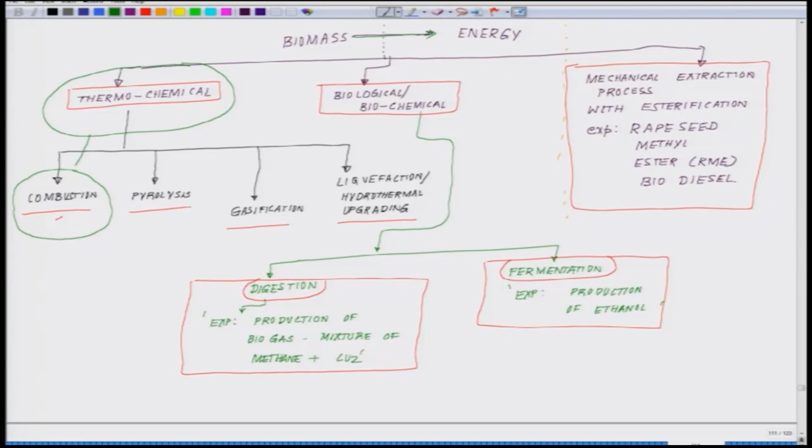Today we will come back to the chart where we left off in the last class, the outline of biomass to energy formation. Our goal today will be to understand the most primitive and simplistic of all processes under the thermochemical category, which is the combustion process. So today we will start with the combustion process.

Let us move on to the slide. As we do in every class, first we will talk about simple combustion. Combustion is a very straightforward thing.

You take a biomass—paper, vegetable waste, or anything as a matter of fact—and you've all seen that cow dung is dried and used as a fuel. Every Indian has seen this wherever they are. Each one of us has seen, during winters or any other day, people cooking with wood. These are common things.

Essentially, wood is a biomass, cow dung is a biomass. So you are burning them in the presence of air. That is all combustion is about. When you burn something in the presence of air, you have oxygen in the environment.

So what happens? Your biomass has a lot of carbon, which reacts with the oxygen in the environment, and it generates two things: carbon dioxide plus heat. Now, what you do with that heat is very important, and how you can process that carbon dioxide.

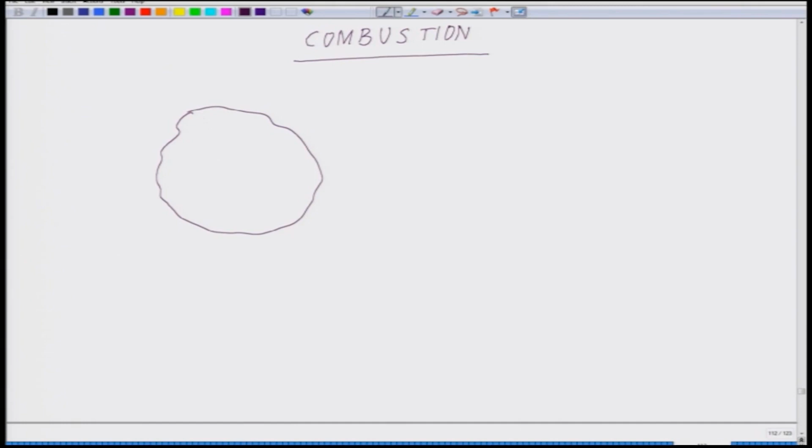Let me graphically put across what I just said. We are dealing with combustion, and in the combustion section, we have, say for example, a finite amount of biomass.

One thing you all must have observed in villages or rural places is that cow dung is used as a fuel after drying. What does the drying do? It removes the water from it. This brings us back to the very first point about properties—intrinsic water and extrinsic water, the water concentration we talked about.

Essentially, you're getting a biomass—feces of a cow or buffalo—which is rich in water. You dry it in the sun, getting rid of the water, and then use it. Let's think of it simply: let me go to the new slide. So, for example, you have cow dung.

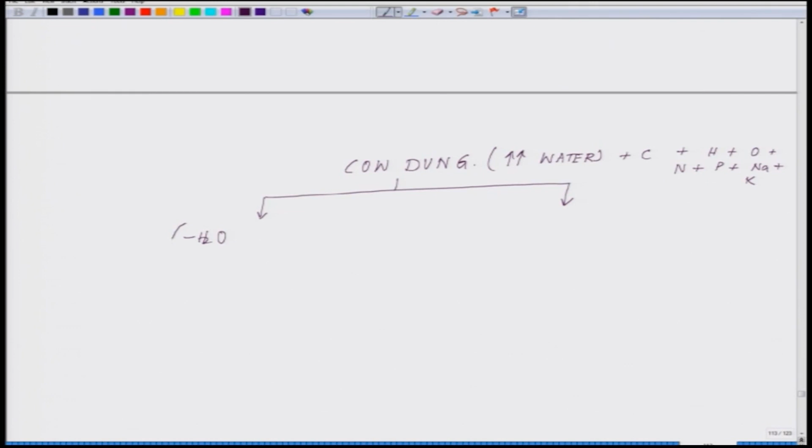This is a good example for you to understand. So, you have two routes. It has a significant amount of water trapped in it, plus of course carbon material: carbon, hydrogen, oxygen, nitrogen, phosphorus, sodium, potassium, likewise.

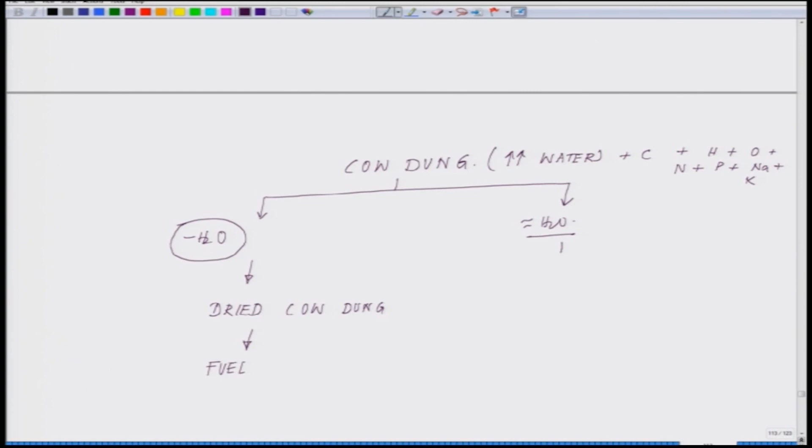Now, one route is you dry this, you remove the water, and what you get is dried cow dung, which is a fuel for burning. Whereas, you can follow another route: you keep the water intact and you put it in a closed chamber, which is a biogas plant.

So, what will happen in the biogas plant, because of the microbes which are present there, this will go through a process of digestion and also a certain degree of fermentation will take place, you cannot avoid it, and this is going to generate gas. This gas could be used for cooking, which in most places in our country, especially rural places, we use.

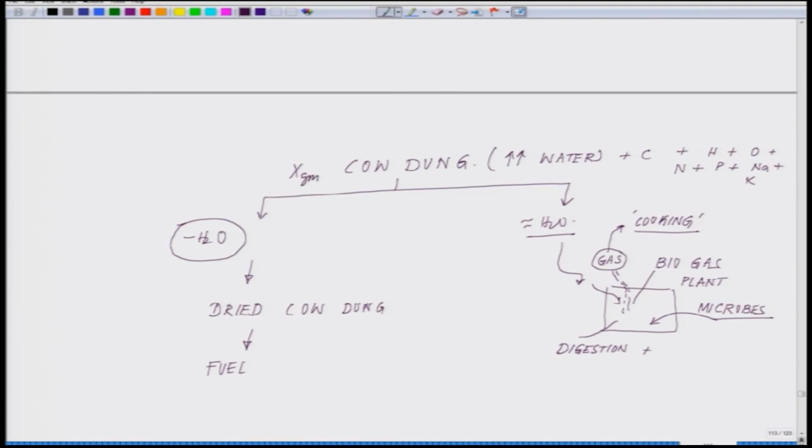Now, see, with such a small simple thing, mankind has been doing it since ages. It is nothing new that only today we have started it. But what is important is that these technologies have to be fine tuned with time and made more efficient, and what is important to realize, depending on the total x gram, x kilogram or x ton,

how much fuel we are getting out of it and how much we are losing as ash, that defines the efficiency of that fuel. So when we are burning this fuel, we are generating heat and CO2.

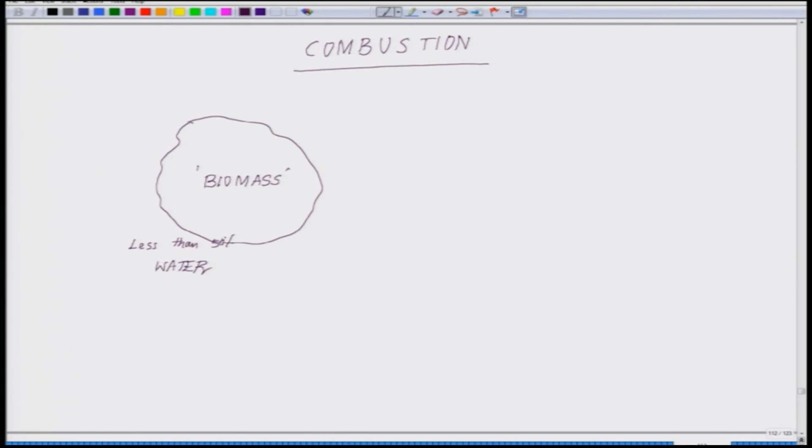So, coming back to the previous slide, when you have the biomass, you have to ensure, if you are going for the combustion route, less than 50% water. This is very, very critical. In other words, one has to ensure that you dry up the sample significantly, that at least 50% or more of the water is lost. Otherwise, this is not suitable for combustion.

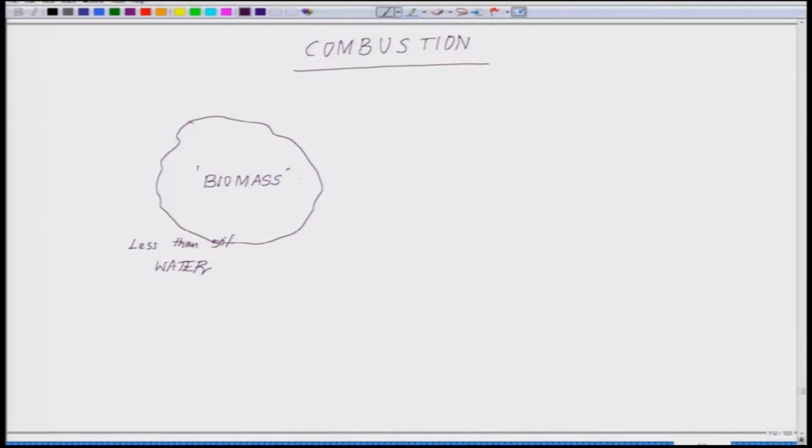Now, you burn this in the presence of air or oxygen. What you are generating, apart from carbon dioxide, because there are a lot of carbons here, carbon dioxide which is getting to the environment, which is a tricky thing, and that is where we talk about carbon capture, what you are generating is heat.

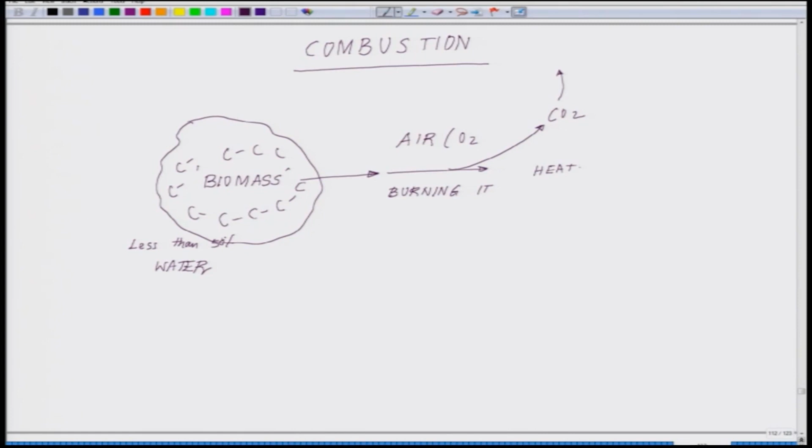Now, this heat could be utilized for several things. You can use this strategy to develop a stove, which is the most simplistic of all. You can develop a furnace. You can develop a boiler; we will talk a little bit about boilers later. You can put it in steam turbines. Similarly, we can put it in turbo generators. These are, to name a few, what you can do.

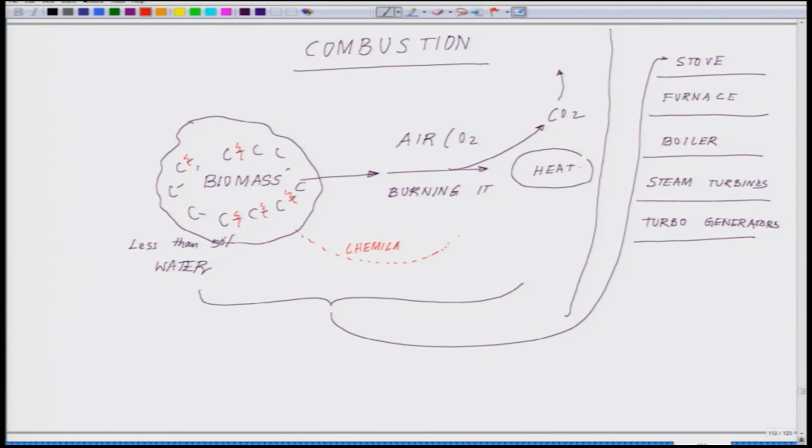And what you are essentially doing, if you remember the last to last class, you are breaking these bonds, and this chemical bond energy is liberated in the form of heat energy. This is how we carry out the process.

Now, while you are running a boiler or steam turbines, you are converting the heat through the steam, and we will talk about boiler design briefly in a sec. Just before I get into this, what is important to know is that this whole combustion process produces a huge amount of hot gas, a lot of it rich in carbon dioxide, at around 800 to 1000 degrees centigrade.

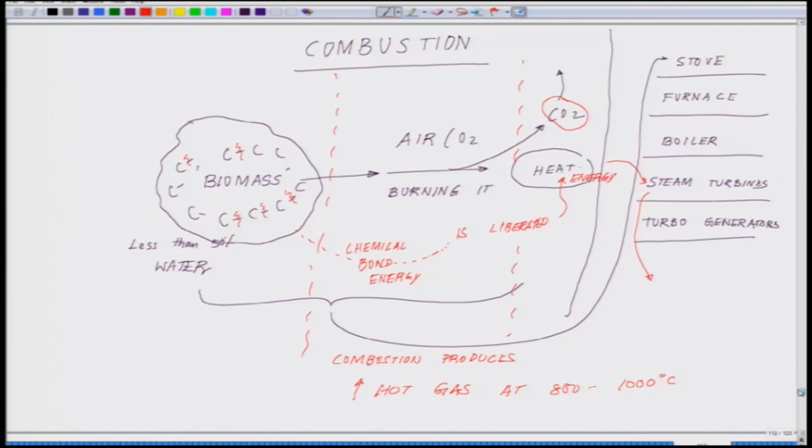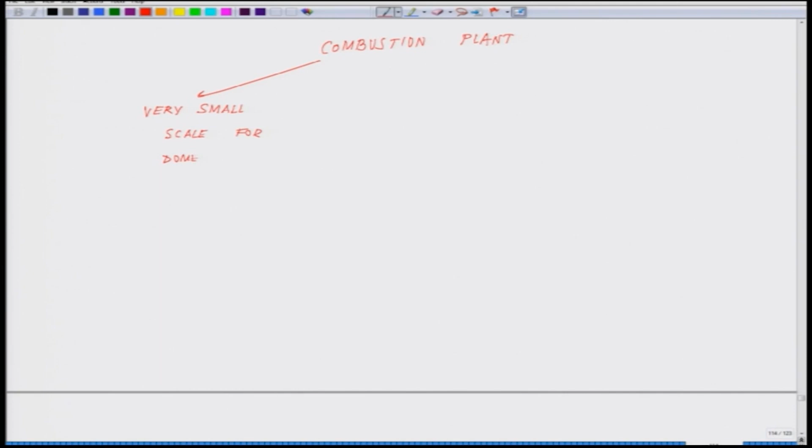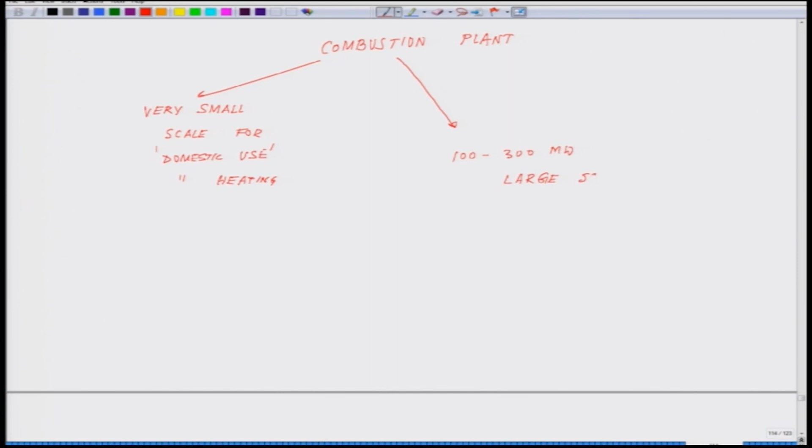Now, coming back, the question is, what kind of combustion plants are we talking about? The combustion plants could be as simple as very small scale for domestic use or domestic heating purposes, or as large as 100 to 300 megawatt large scale industrial plants.

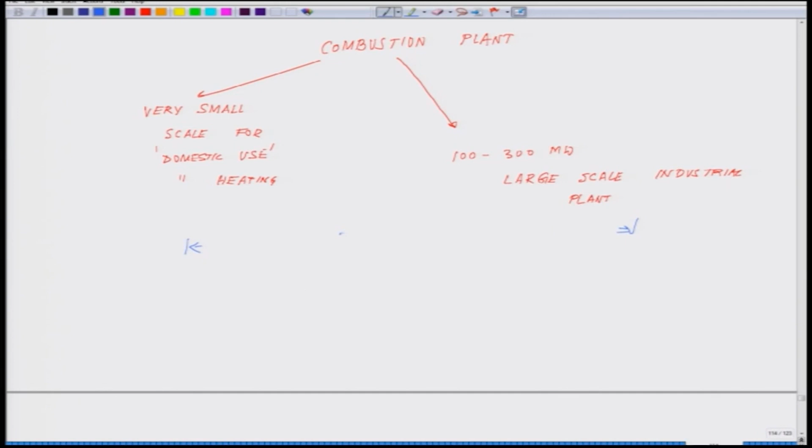Okay. So, this is the conversion, but interestingly, if you look at their efficiency, as I was telling you, the efficiency is around 20 to 40%. Net bioenergy conversion efficiency in the power plant ranges from 20 to 40%, whether it is a small or a large plant.

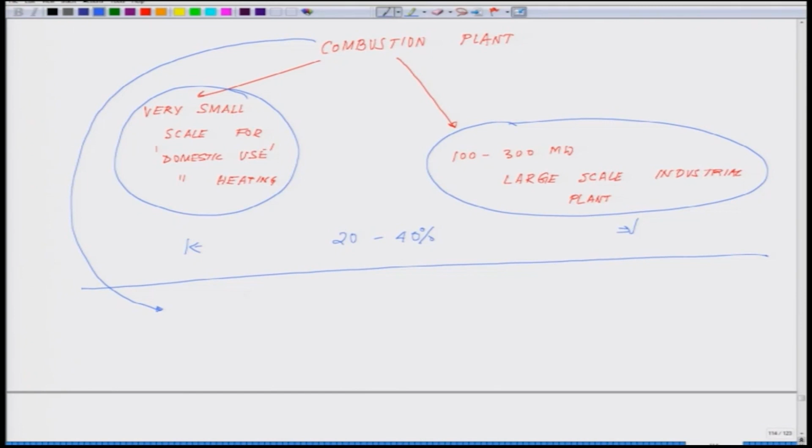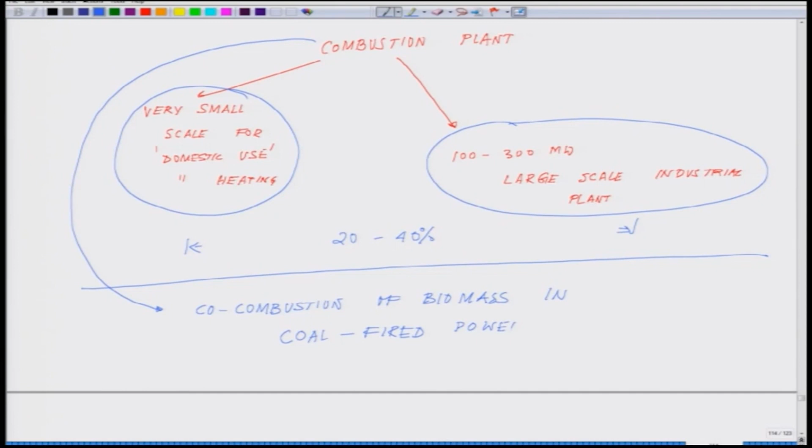One of the ways by which one can really increase this combustion plant efficiency is co-combustion of biomass. Now, we will talk about what that means: co-combustion of biomass in coal fired power plants. Okay. So, what are coal fired power plants? Before we get into the coal fired power plants, we will talk just a little bit about the heat.

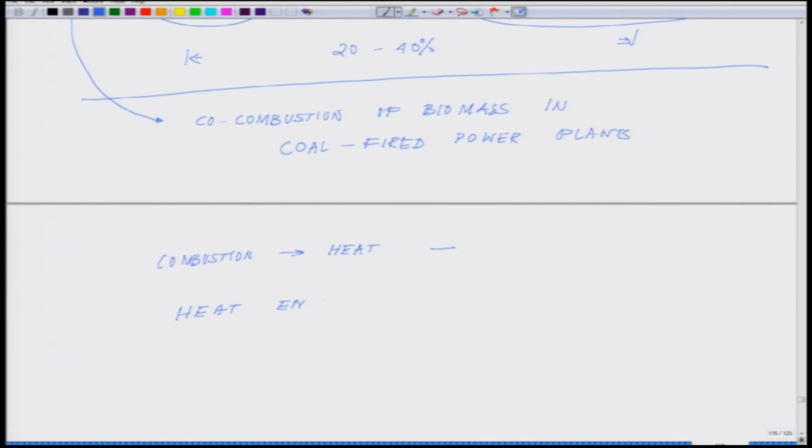So, what we are doing through combustion is generating a lot of heat. One of the ways is that you can feed this heat to heat engine cycles. One example is the Stirling cycle, which uses combustion to provide the shaft power. So, you are moving the shaft. Basically, you are converting the heat into mechanical energy, shaft power, directly.

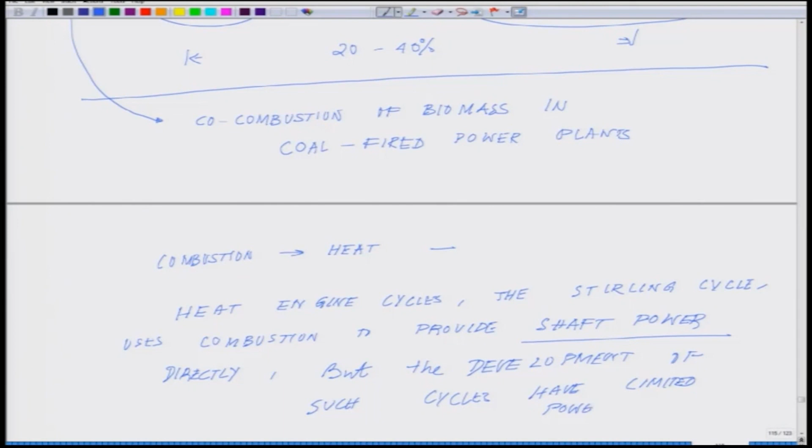But very interestingly, the development of the cycle is presently limited to a small power output. Development of such cycles has limited power output. I am just putting OP as the output.

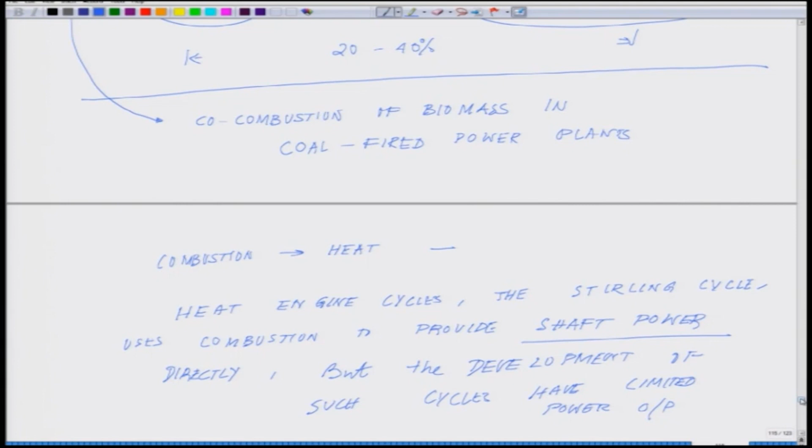Okay. Now, coming back to the combustion plants, we are talking about coal fired combustion plants. For those who have never been exposed to this, first try to understand what happens in them. So, there is a boiler filled with water. Underneath, you have coal. Most of these coal fired plants grind the coal and put it there, and you heat the coal. As the coal is burning, the water starts to boil

and it generates a huge amount of steam. This steam is funneled through a tube and fed to a turbine. Because of its impact, the turbine starts to move, and once the turbine moves, the generators also start to move and they generate the electricity. Let me put the schematics for you, that will make more sense. So, you have a boiler sitting here. Underneath the boiler you have this coal. In the presence of oxygen, you are heating it.

So, what you are generating is a lot of CO2 and a lot of heat, and you have the water. This heat which you are generating here is boiling the water, which generates a lot of steam. The temperature of steam from such boilers comes out to be around 600 degrees centigrade.

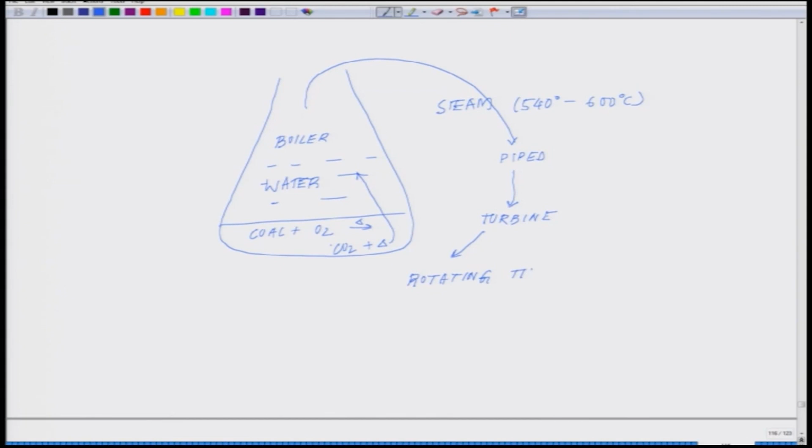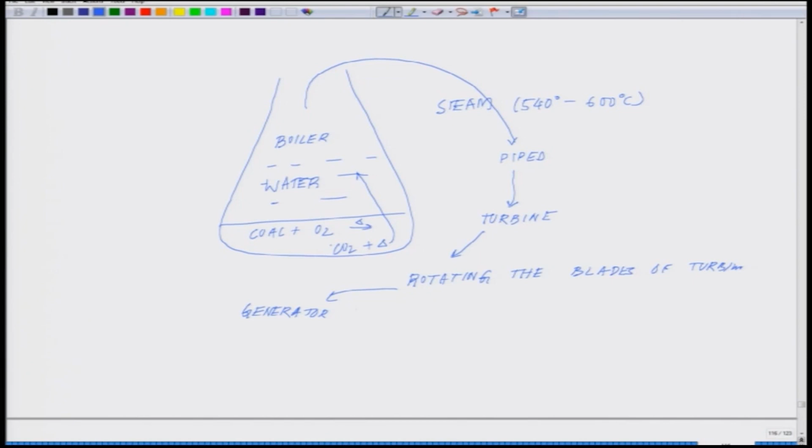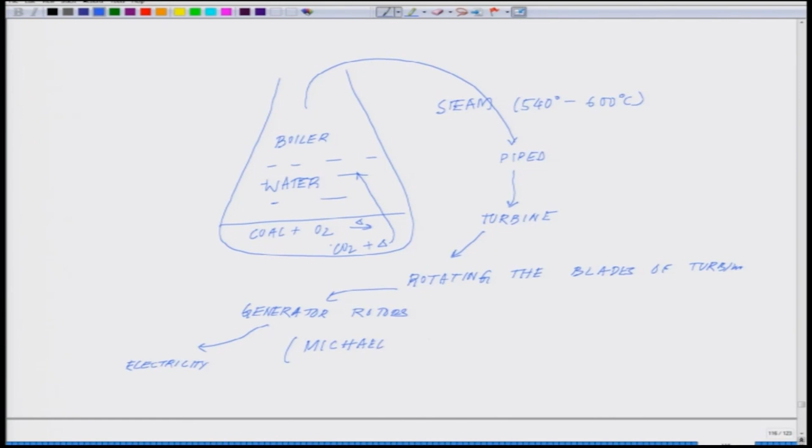This steam is piped through a funnel to a turbine. And the impact starts rotating the blades of the turbine, and that activates the generator rotors, and these generator rotors then generate the electricity, which follows Michael Faraday's electromagnetic induction. Okay. So, this is the basics.

Electromagnetic induction. This is something I do not know how many of you have seen. There are bulbs attached to the dynamos, if you have seen it.

When you ride the bicycle, the bulb glows, because it is the mechanical energy which is translated into electrical energy by passing it through the coils. Okay. So, just go back and check the basics, and if time permits, definitely I will come back to this.

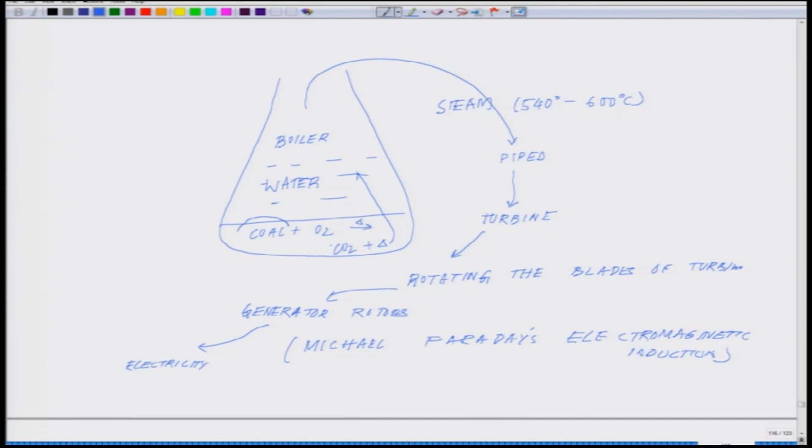But what is important here? So, the point I am trying to make: if you look at all the inputs you are putting in for generating electricity, you needed a regular supply of coal, you needed a significant amount of oxygen. These are inputs, I am just putting IP, okay, inputs. You need fresh boiling water all the time.

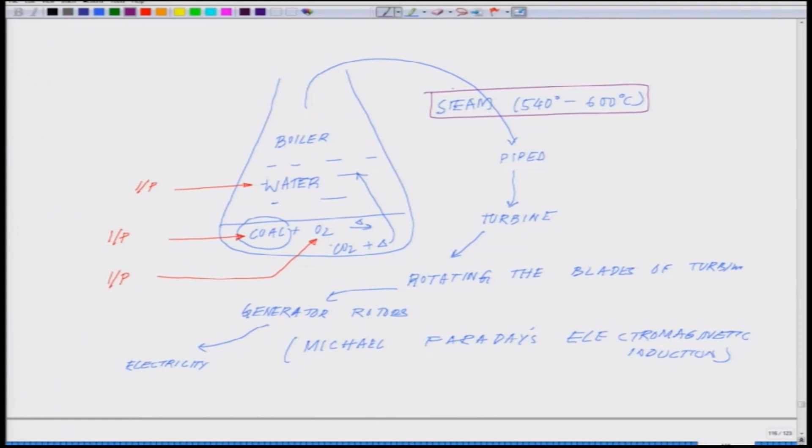And your outputs are: you have this steam, which is an output, you have a significant amount of carbon dioxide as your output, OP, okay, output. And then you have to run the turbine. So, you have to have the materials, you have to have the piping which can withstand this kind of temperature.

And for 500 megawatt power, you need 1.6 million cubic meters of fresh, good quality air. This is the second requirement when we talk about the air. Okay, this is the second requirement.

And what you are giving out in this whole process of burning, apart from the carbon dioxide, you guys remember we talked about the ash, there is a lot of ash which is formed, and the ash is around 200,000 tons per year.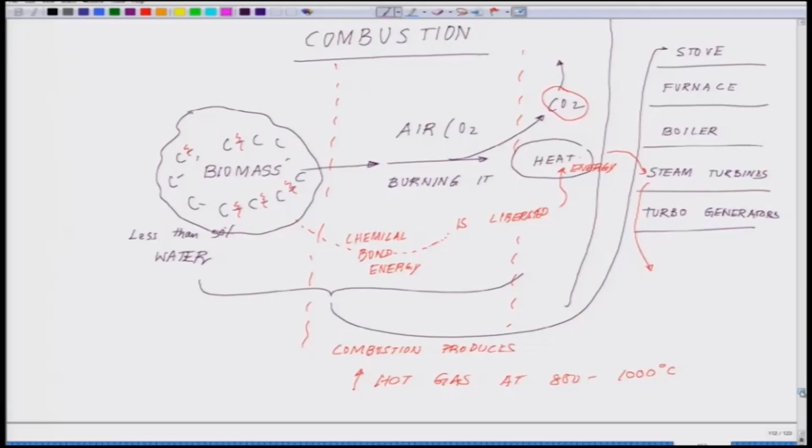Okay. So, this is overall what I wanted you to understand about the combustion process. In combustion, always remember whether you are burning it in the presence or absence of oxygen. If we go back a little further to where we talked about the different routes, this is what we talked about in the presence of oxygen, and the next technique, pyrolysis, we will talk about in the absence of oxygen. So, I will close here, and we will take it up from here.